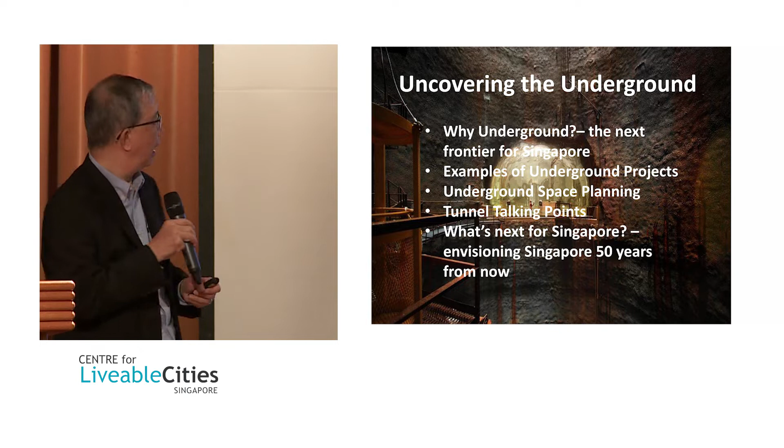There are also several journals on underground space, but they generally tend to cover countries in Europe and the Western Hemisphere—not many cover things inherent and intrinsic to Singapore.

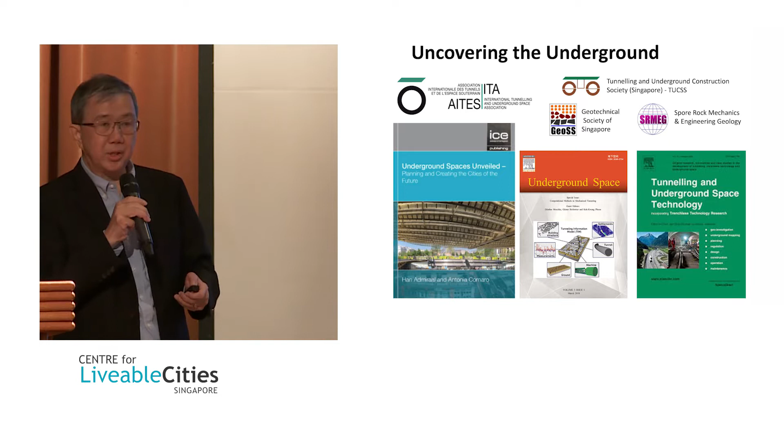So we have three societies here: Tunneling Underground Construction Singapore, the Geotechnical Society of Singapore, and the Singapore Rock Mechanics Engineering Geology society. They organize regular symposiums about tunneling and underground construction in Singapore, where you can find a lot of local information.

More recently, Arup was commissioned to do a benchmarking study and establish guidelines for underground space planning, submitted to URA, from which they organized an exhibition called Underground Singapore: Next Frontier. If you don't have this, you can go to the URA website—the documents are all available. Even Hong Kong has a 'Cities Without Ground' guideline on this.

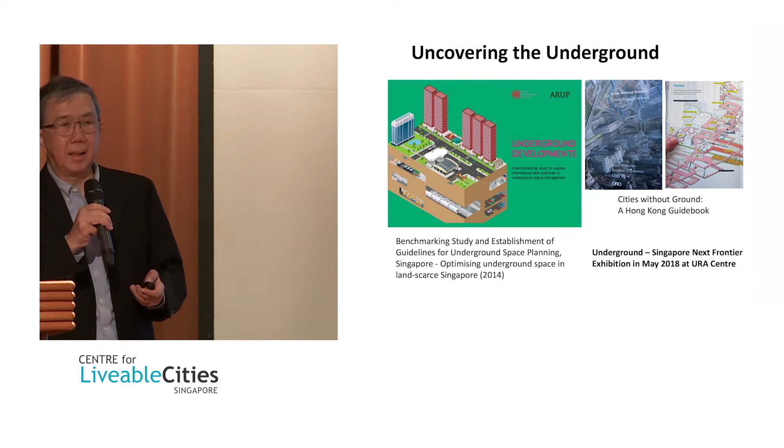So literature abounds—it's nothing new, but unless you actually work on it, you still find there's something uncertain and unusual about underground. So as we move from the knowledge base, where we have a lot of information, what do you mean by underground, and why underground?

First, I'd like to take you through the perspective of Singapore. We are basically a finite land area of 700 square kilometers land and 700 square kilometers sea—so this is our boundary, total 1,400 square kilometers. And that is finite, okay? That is finite.

We have challenging geology—soil and rock. About two-thirds of it has basically rock near the outcrop, near the surface area. Another third, the rock is further down. But as far as I'm concerned as an engineer, the whole island is actually on rock anyway—it's just what is above the rock, whether you have weathered material, or the yellow part, which is soft formation, or the orange part, called Old Alluvium, which is basically stiff, dense sand and stiff clay.

Now, it is challenging geology, but it's not that we don't know it. There's been a lot of work done, much due to LTA works and Singapore Power works, so anything we need to know about the conditions on the island, I think we are very familiar with.

What we do not know, and which is going to be taken up by the underground geological survey, is going deeper beyond the usual 50 meters that we do in exploration.

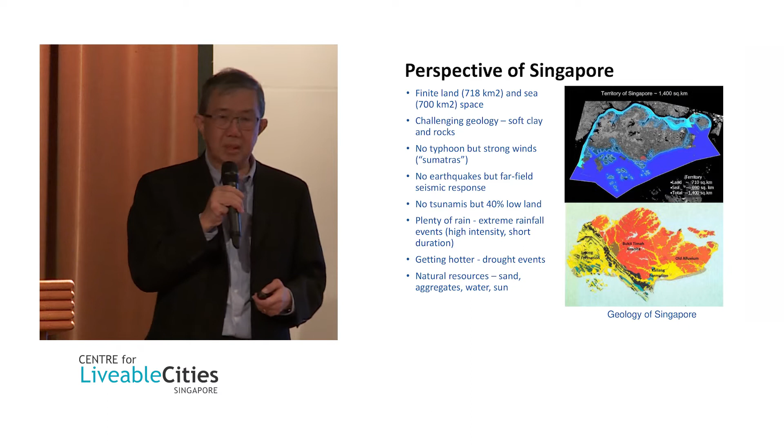A lot of people say that we don't have resources, but we do have resources. We have plenty of sand - they're all in the western part. There's a lot more sand we want to mine, but of course they're also in the way of development. Then we also have aggregates that can come from all the rocks that you intend to mine. You excavate underground, and you provide a lot of aggregates. And then we have plenty of water.

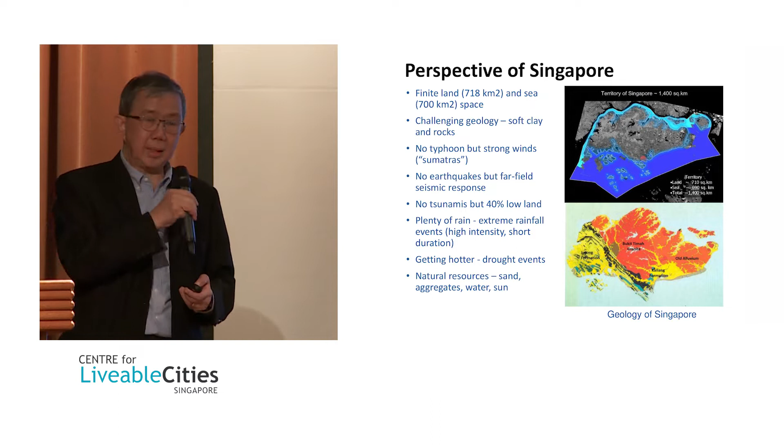This comes from our rain, but we don't collect enough of it. And then, of course, we have plenty of sun. We should look at this natural resource and see how we can leverage it, rather than say that Singapore has no resources. Singapore is a small island, but we have big needs.

Let me clarify between a city-state and a city in a country. Take London, for example - if London needs an airport, London has the old London City Airport, but to extend, you just build outside of London at Heathrow. Singapore's airport, port, defense, commerce - everything must occur in our 1,400 square kilometers of sea space and land space. So it's a very tall order to try to accommodate all of this, where many cities worldwide have a lot of hinterland for them to grow and put all the other non-essential things.

Because of that importance, there was an interministerial committee on sustainable development in 2009. First of all, the motivation is a lively and livable Singapore. And what were the strategies for sustainable growth? So one of the key strategies, apart from all the other economic direction, is basically how to expand land resources: go higher, go wider, go deeper.

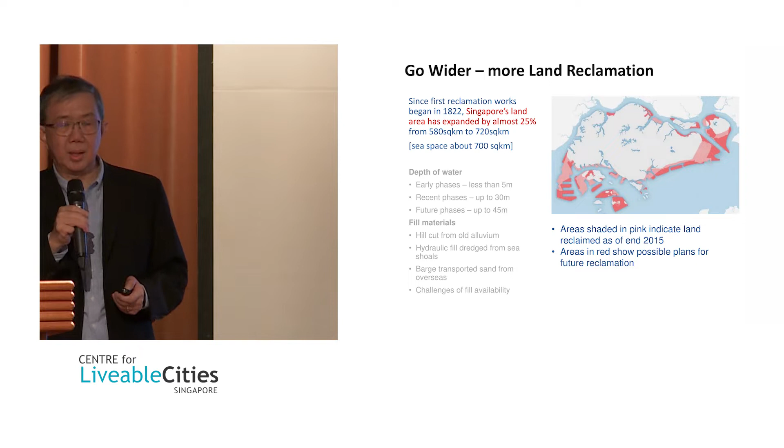Go higher - we're beginning to see HDB buildings go up to 40, 50-story blocks. In the past, it was up to 20 meters, 20 stories. And go wider - basically we've reclaimed almost 25% of our land since we first started reclamation in 1822. The first reclamation was in Telok Ayer.

Then we look at all these areas down here. The pink areas are those already reclaimed as of end 2015, and the rest are potential areas to reclaim. But as many of us know, we're having a problem with sand supply, so the difficulty of getting sand is challenging our ability to complete reclamation. Under the NRF as well as the NIC project, we've been looking at other alternative methods of reclaiming land, including even the possibility of floating platforms and so on.

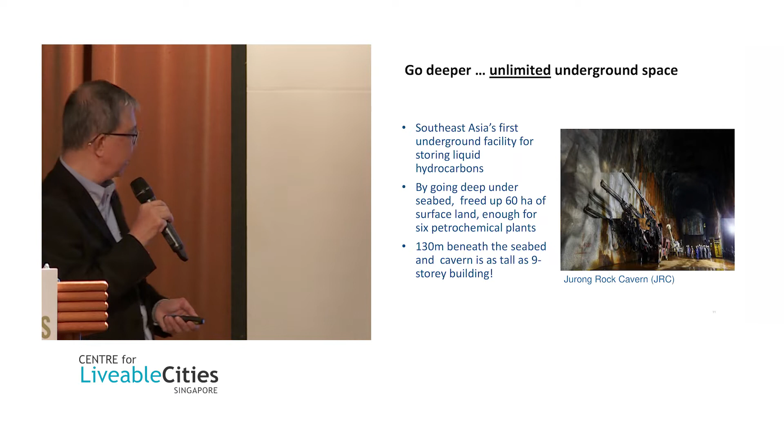Now we go deeper. As I said, when you want to go deep, it's unlimited—you can go down to the center of the earth if you want. I'll tell you the reasons and challenges of going underground. But basically, this is our deepest facility: the Jurong Rock Cavern, 130 meters beneath the seabed in Jurong Island. This cavern is as tall as a 9-story building, used to store hydrocarbons.

Now, my definition of underground—many people only associate it with caverns. No, to me, my definition of underground is anything beneath the ground. Right now it's a very structured procedure. Although we still don't have an underground master plan, in some way we do have structured guidance on where we put our underground facilities.

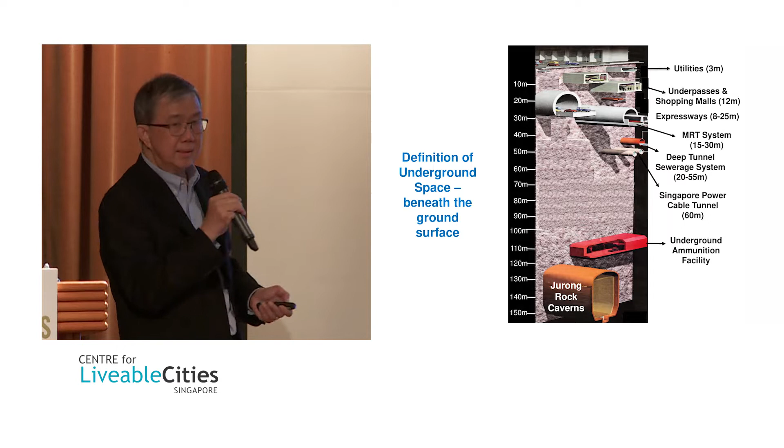Utilities are generally in the top 3 meters. Our shopping malls and other parcels go up to about 12 meters, sometimes deeper for 3 to 4 story basements. Expressways go up to about 25 meters, and generally they tend to be higher than the MRT because you need ramps to get into them—the deeper you put it, the more ramps and more land take. So you try to put your expressway or road tunnel as near to the surface as possible. But for the MRT system, you can use elevators to transport people down into stations, so you can put that deeper—you don't need ramps to bring things above ground.

Below the MRT, you'll be 20 to 55 meters down for your deep tunnel. The main tunnel trunk is usually at 40 to 50 meters. The 20 meter ones are the link sewers that try to connect everything into the main tunnel. Then you have the Singapore Power cable at about 60 meters down.

And then we have 2 cavern projects. The first is the underground ammunition facility, which is actually in granite. Then in the Jurong Rock Cavern, this is in what we call sedimentary rock. So we've done both rock formations in Singapore to show that both are actually possible.

The purpose for both of these going very deep down is because they're looking at the quality of the rock. As we know more and more about it, there's nothing to say that we cannot have underground structures anywhere in this area. In fact, the possibility of even constructing in soft material is now being researched at NUS, where they look at how you can treat those areas to make them usable for underground use.

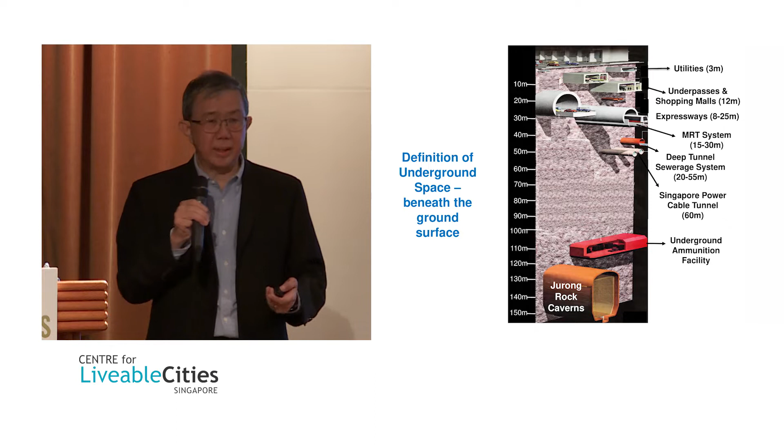So let me take you to some of the other underground projects. Now, I will ask many times—how ahead of the curve is Singapore in terms of global underground space? We are very far behind.

We are very behind because everybody cites cost as a reason for not going underground. I think there has to be some mindset change about the possibilities of going underground, because everywhere else in the world, they're already doing it. So we are far behind—you'll see from some of the examples I'll give you how far behind, but at the same time I'll also show some of the projects we have actually done.

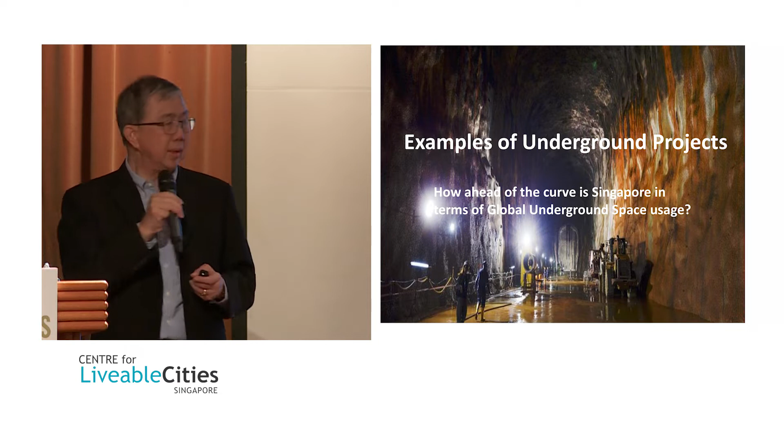Thanks to the History Channel, you can easily find that we already had underground cities as early as the 8th century BC. In Turkey, there are 36 underground cities. The biggest, of course, is Derinkuyu underground city, which could hold 20,000 people up to a depth of 85 meters. This is typical of it.

They were able to do it because they have volcanic rock, what we call in engineering terms 'soft rock.' Soft rock is easy to excavate and quite stable in that respect. Most of the underground facilities in those early days were always used as a refuge for war and invasion.

So if you go into the second example, I show this just for a lighthearted touch—this is Pilsen, which was used for storage but also as an escape route. The reason I show that is, for those who love beer, this is a pilgrimage city—you should go. The biggest beer drinkers are not in Australia and Germany, they're actually in the Czech Republic in Pilsen.

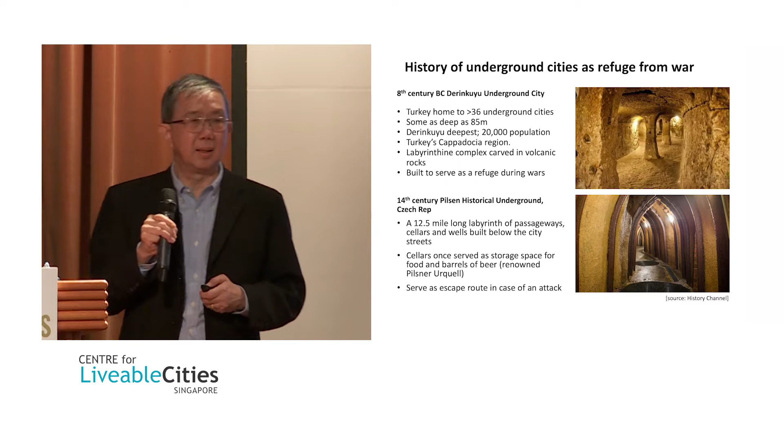That's why you go down there, they drink beer as if they were drinking water. You should make it to Prague, a nice place to go if you haven't been there, but go and visit Pilsen. It's a very nice place for you to visit.

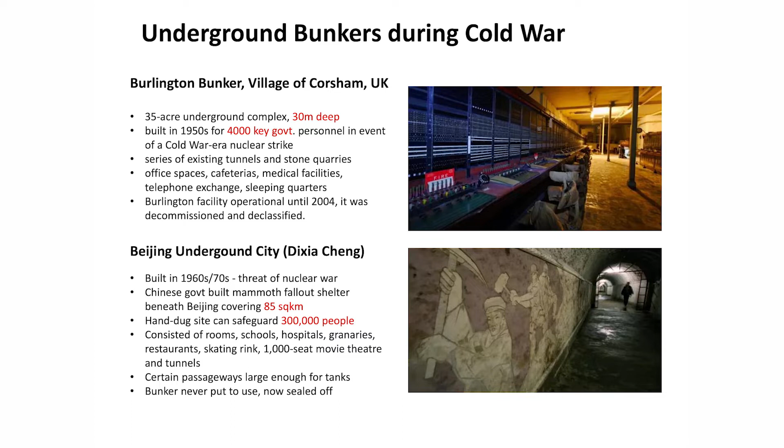Then in the Cold War, we have underground bunkers. The British built the Burlington bunkers. Beijing has an underground city that not many people know about. They opened it up for public viewing in 2000, but closed it in 2005 for two reasons: one, it's been used by homeless people; two, for security reasons they decided to enclose and seal up all the underground city bunkers. But they are not small—these bunkers are big, 30 meters deep, can hold 4,000 people.

In the case of Beijing it's even bigger, 85 square kilometers, and can hold 300,000 people. Some say even up to 1 million. The good thing is that they are not used and don't have to be used, and that's interesting. I'm just showing two examples, but everywhere in the world, I'm quite sure even in Singapore, every country will have some bunkers for defense purposes in case of attacks. This is already common in every country.

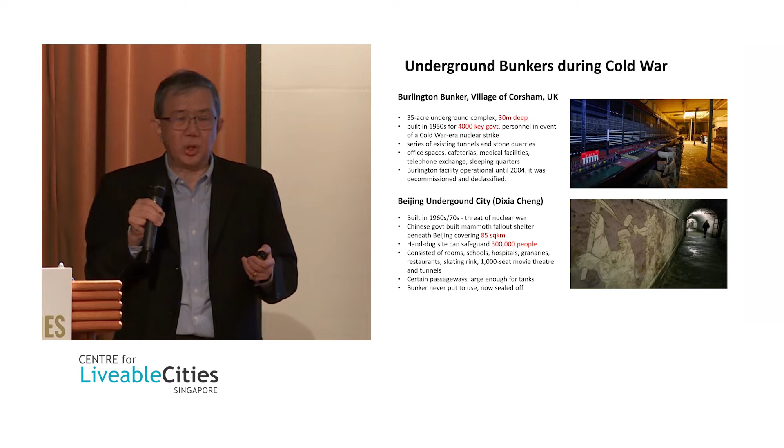You go to Russia, they're full of it. The biggest number of bunkers that I'm aware of is actually in the Middle East. Their bunkers are so huge that they have hospitals, schools, everything that you need to survive if there's an air attack.

For modern day underground cities, there are many examples, but I'll highlight Montreal because it's best known. This is RÉSO, French for network of connection—a network of tunnels. This is one of the biggest, and all they did was try to link up all the basements of the Montreal underground. 500,000 people spread over 4 square kilometers—roughly the space between Orchard and Marina Bay, all the area together.

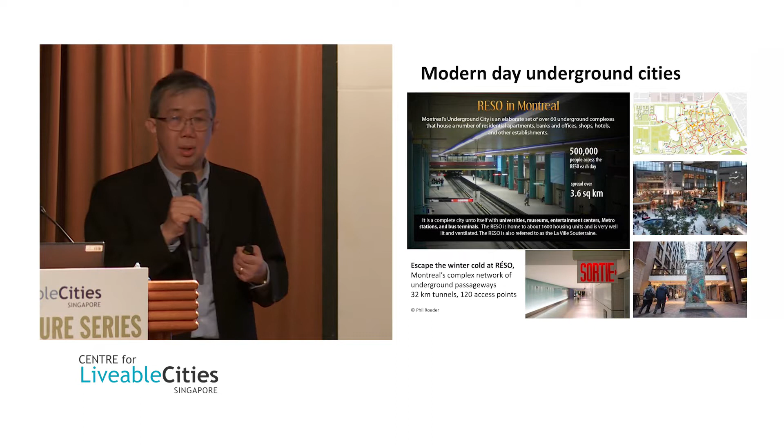The important thing is that it's actually a place the community looks forward to—a place to escape the winter cold in Montreal. This has been used very widely. Even though it's underground, through clever engineering you bring in daylight, you still have trees—nobody says you can't have underground trees—and you can have skylights dropping light down into the underground. So all of this can be done.

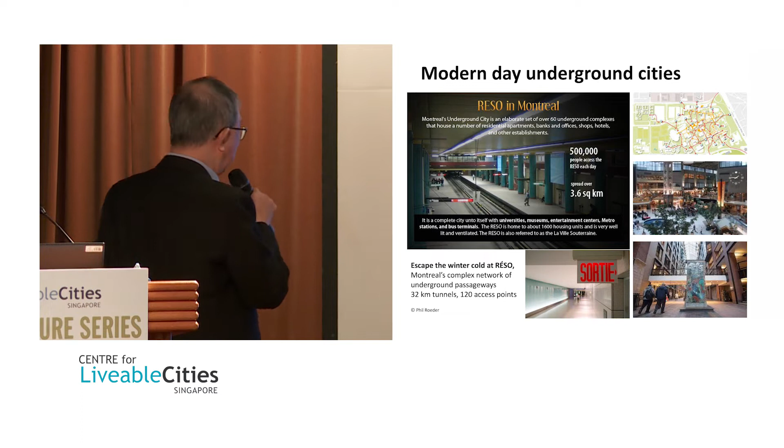Many countries now, because of climate change and high intensity rainfall, are building underground stormwater drainage. The Hong Kong West Drainage Tunnel, basically deep, tries to take away most of the runoff from the hills so it doesn't go into the city and flood it. Tokyo already has the G-Cans project—an underground tunnel 6.4 kilometers long, linking 5 silos where they collect water from all the areas, then bring it into one huge tank called the temple, where they store the water.

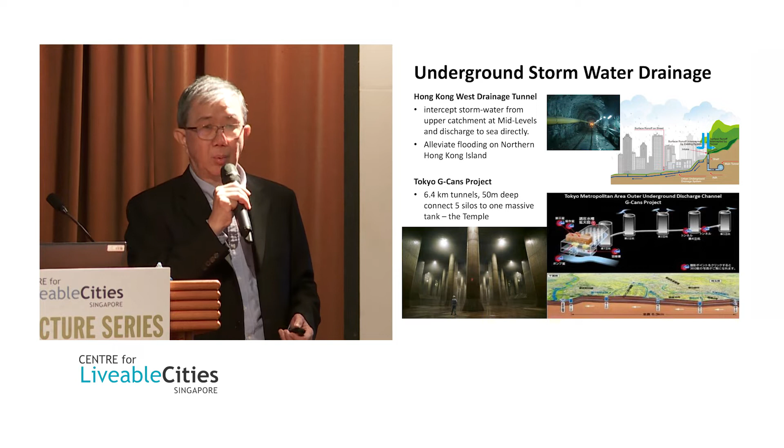I understand PUB is looking into something like this, and I think they should. Rather than widening or deepening the existing surface canal, we should try to put the stormwater drainage underground. We've already done it with the deep tunnel sewage system, and there's nothing to say we can't do a similar one for the stormwater system.

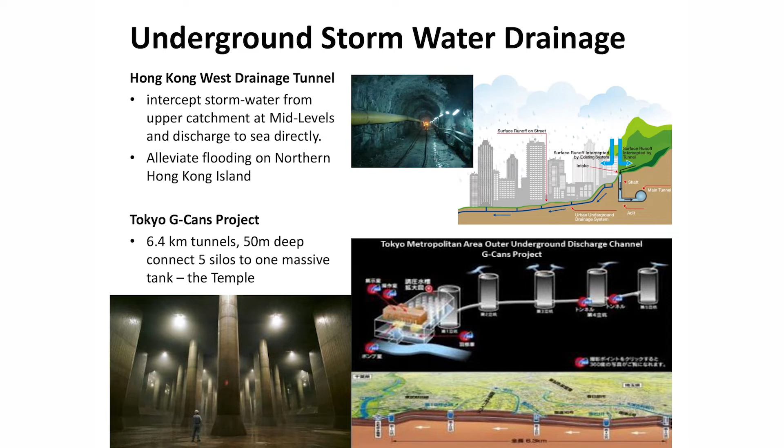But the country that's leading in all underground construction is actually China. In the past, many of the technologies that we've used in Singapore came from Europe, then Japan and Korea. They were all doing underground work. And then more recently, much of the technologies and new ideas are coming from China.

They have 65 cities that are going to build metros all along. Many of the cities are actually expanding vertically. They found that cities expanding laterally have issues of transportation and other problems, so they're beginning to go vertically. Many of the cities are also having underground master plans.

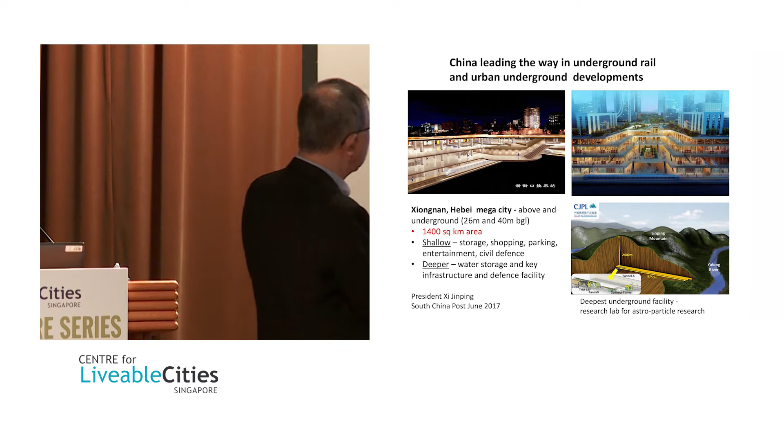I happened to be in China as a technical advisor to the Shanghai Municipal Commission that looks at the use of underground space. When I was there, they shared that in some of the lines, Shanghai is so developed they can't find anywhere to put the station. So what did they do? They buy up basements within shopping areas and convert them into underground stations, rather than build another station from scratch.

And two of the stations are now being converted from formerly commercial complexes.

And the deepest underground facility that I know of is about 2.4 kilometers. This is actually in China, in the Jinping Mountain, where there are the deepest underground facilities for astroparticle research. This has already been completed at 2.4 kilometers, the deepest that I know of. But again, in the case of China, they do everything big.

The presidency announced, as reported in the South China Post in June 2017, that they're going to embark on a mega city in Xiong'an in Hebei. Hebei is basically the province surrounding Beijing and Tianjin, once you extract those two cities out.

They are looking at two levels, one at 26 meters and one at 40 meters. Where it's shallow, at 26 meters, they put storage, shopping, parking, everything. At 40 meters, they're going to put water storage, key infrastructure, and of course defense facilities.

So Xiong'an is actually near Beijing. This is all in preparation—if there's any unintended attack, they just go into the Xiong'an mega city. But otherwise, in normal day-to-day life, it's still going to function as a city by itself.

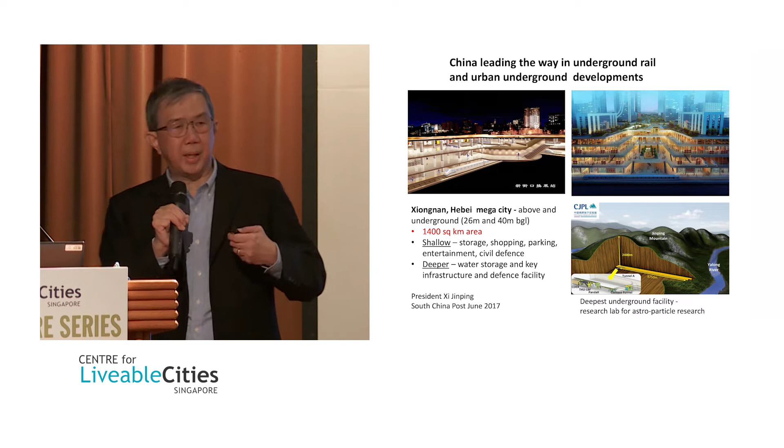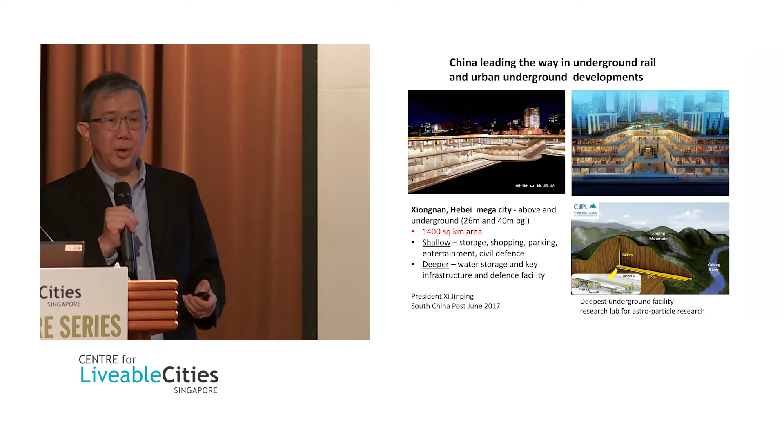I won't talk too much about this other than my own experience with underground projects in Singapore. I've been involved with the LTA, both as a board member, from which I've stepped down, and for over 12 years as chair of the IPA, the International Panel of Advisors, where we look at all the geotechnical and construction issues in our LTA projects—an international advisory panel where we also learn from what the rest of the world is doing.

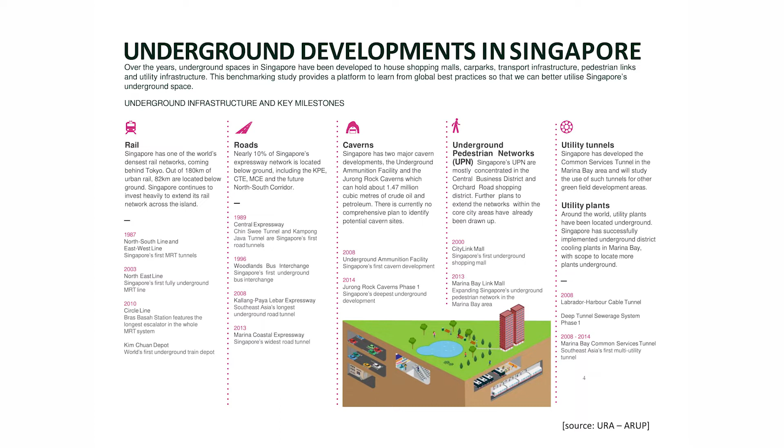This is one of the bigger uses of underground space in Singapore, our rail transport system. Bencoolen right now is actually the deepest station at 45 meters.

Now I'm involved in some land optimization efforts. The next three slides show land optimization efforts at a whole-of-government level. The first was the earlier one on underground ammunition storage.

If I can take you through this quickly—this was all driven by Professor Lui when he was the chief defense scientist in MINDEF. Before then, ammunition was stored in an area where we had to sterilize 1,000 hectares of land, because if there's an explosion, it can't reach the neighborhood. The current rules and underground storage standards for explosives, which came from the West, show that we need about 240 hectares to put everything underground.

Then Professor Lui, together with these engineers and NUS and NTU, started a series of research pertinent to our local conditions. What we were able to do is get our ammunition storage down to a footprint of only 100 hectares. One of the interesting findings was that water is actually the best defense against explosive waves.

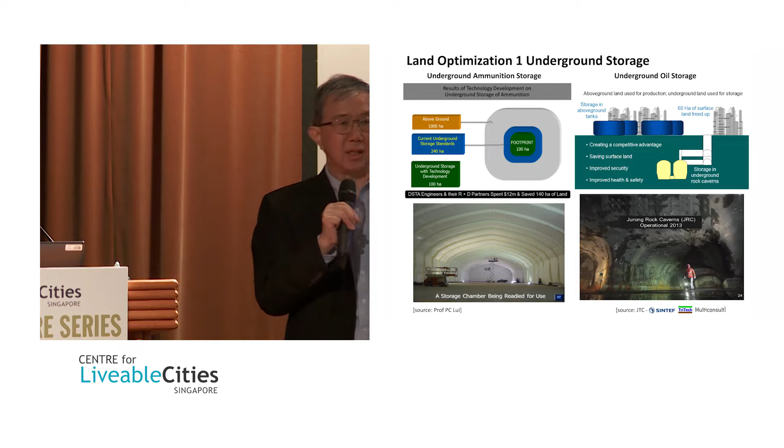Any explosion energy waves that come up from an explosion, water is a very good dampener. And that actually formed the whole basis of design for this underground facility.

Of course, we had to do a lot of simulation. We did tests in both Norway and Australia to show how things work. The rest of it, including the defense, the gate and all these, were all tested. So finally, we only need a footprint of 100 hectares underground, and we therefore free up all the 1,000 hectares above ground. And this is what you see in the underground. It can be as pleasant as you want it to be.

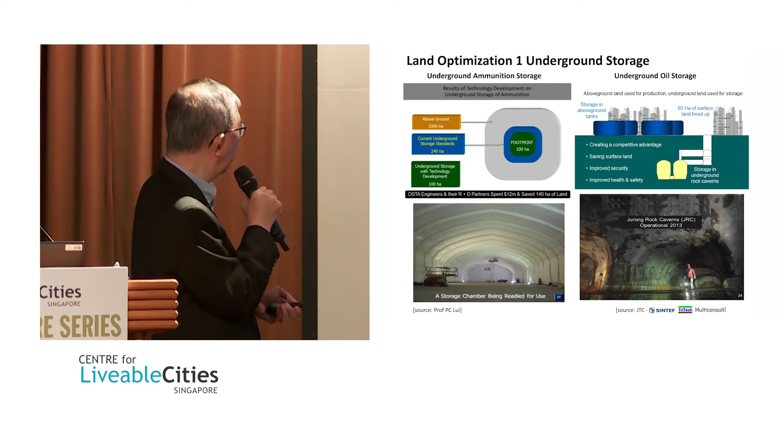The second project we've done is the underground oil storage. This is the Jurong Rock Cavern, completed and operational around 2013. There's another phase going on, I understand. You can see down here, these storage tanks above ground occupy a lot of space. You put this storage all below ground, you free up a lot of land for other surface activities that's needed. On top of that, you're improving security, and you're also improving health and safety in this area. This is actually the completed Jurong Rock Cavern.

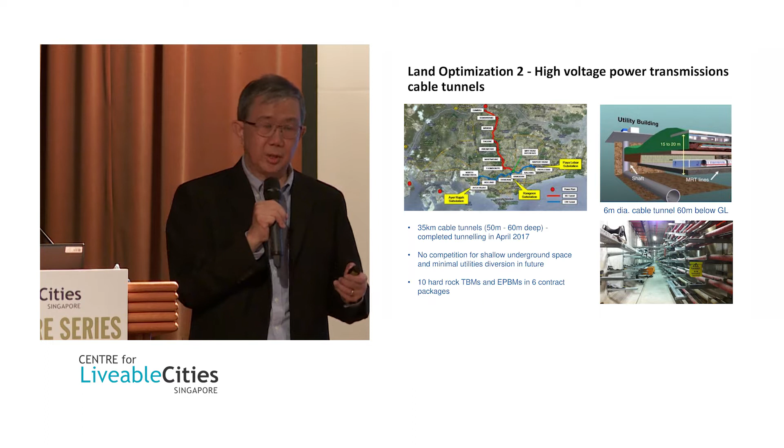Land optimization two, we're putting all our cables very deep. This is the high voltage project which I was involved in. Because we did not have the 2015 Parliament Act passed at that time, they had to basically follow all the expressway routes, following the CTE, following the AYE, in terms of having to go under the roads. Unlike the MRT, where there is an easement right that lets them go underneath buildings, the cable tunnels didn't have that opportunity at that stage. But things have changed with the 2015 Act of Parliament.

So essentially, this is 35 kilometers of cable tunnel, 50 to 60 meters deep, and they generally go very deep below all the infrastructure. This is what it looks like now, today, inside. You cannot tell the difference between whether this is 60 meters or actually 10 meters below the ground. They are trying to move a lot of it underground, but there are still surface utilities that we have that I think we are not doing much about.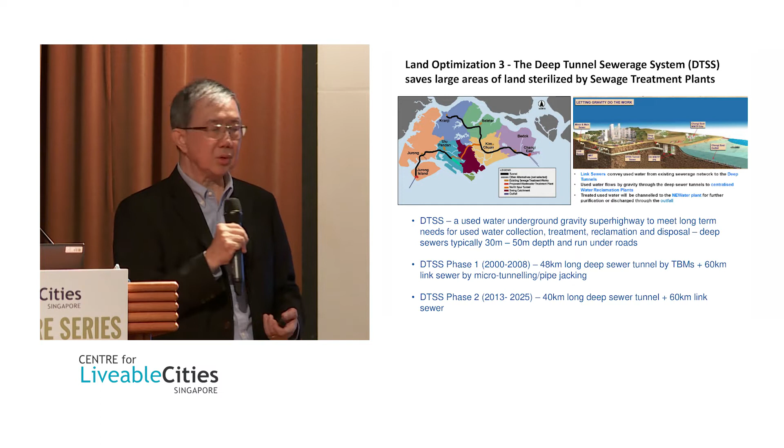The last land optimization is the deep tunnel sewerage system. You can see that this is now going on to phase 2. Phase 1 we have actually completed, and it's around this area. Phase 2 now is actually from this area onto this area. Basically, again, this is just putting everything underground so that it does not cause disruption at the surface. These are facilities where you don't need people, you only need to send in a maintenance crew, and these are things that can actually go underground.

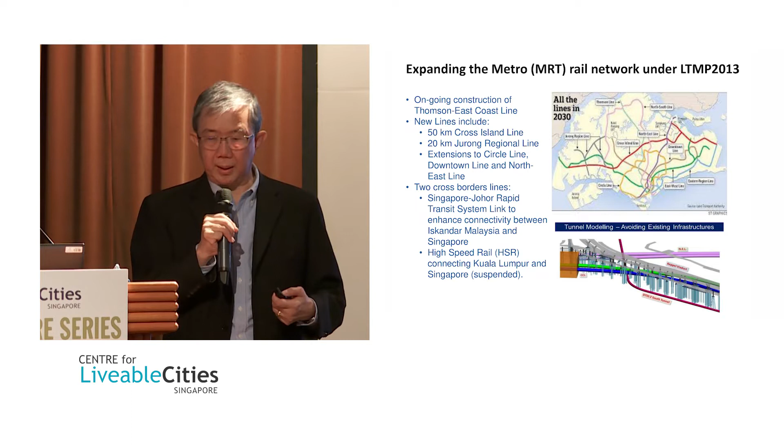And of course, we're also expanding all the metro. There are lines indicated here. Currently in construction is the Thomson East Coast Line, but then we are going to have the Cross Island Line, Jurong Regional Line, extension to the Circle Line, Downtown Line, Northeast Line, and a couple more lines being considered, because if we need to achieve the vision of 8 out of 10 homes within 400 meters of a station, then you need a lot more lines to cover more parts of Singapore.

Now, as we have more and more lines, I have a very simple slide here to show that when you look at all these, you have the Northeast Line, the Keppel Viaduct, the Deep Tunnel Sewerage system, the Circle Line, and a lot of infrastructure. So in fact, the underground is really crowded. We can all build this engineering-wise, but it costs a lot of money to protect the existing structures in order to build the new structure. This could have been saved if we had actually done underground space planning earlier.

This is something that the government is well aware of, and they started doing this underground space planning at least 5 to 8 years ago. The way the URA has planned is that they have a concept plan, and then this 5-year regular review of the Master Plan Committee that governs all development in Singapore within a 5-year time frame. Then you have the Communities Facilities Co-ordination Committee that looks at the whole-of-government approach.

And then, of course, the recent one is underground. You have the Underground Masterplan Task Force led by the MND, and then you also have Advanced Planning Interagency Coordination of Future Underground Plans.

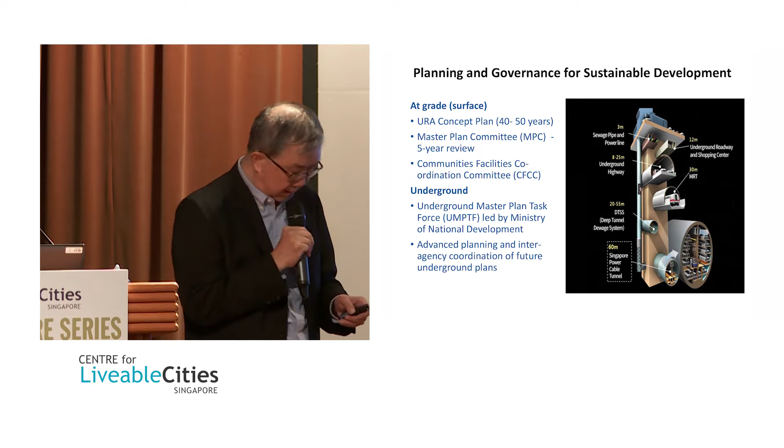Now, I'd like to show this slide mainly from the fact that, if any one of you out there know where this information came from, I'd like to put it as a source. I took it out somewhere and forgot where exactly. I tried to trace all the papers I read, but I don't know where it came from. If you are the original author, please let me know, so at least I can give due credit.

But what I like about this picture is it shows what I hope one day we'll be able to do. We don't have to build underground highway, MRT tunnel, deep tunnel all as separate tunnels taking up unnecessary space. This is what I hope you'll call the mother of all tunnels—you put everything into one, and they can share the space there. I only need to do tunneling once, disturb people once, find the right depth, and meet all the requirements.

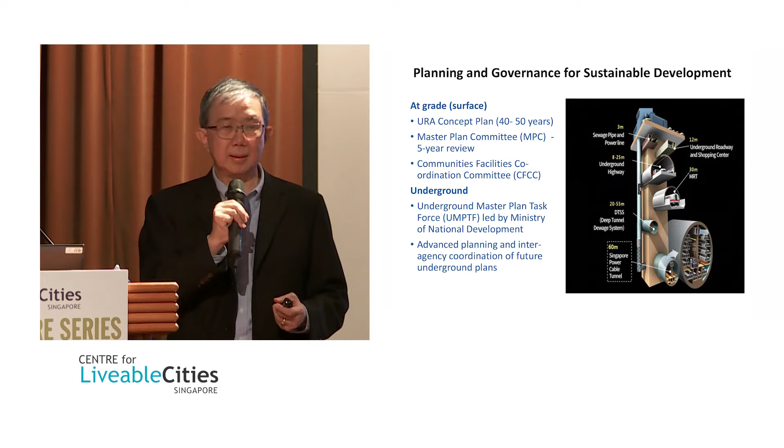But these kinds of things have to be done very, very early, at the real planning stage, before we even need it. The reason why we have to allow each of these separately is because everyone came in very late, all for strategic reasons—if they don't finish by a certain time, something's going to happen to the country, so we just carry on building.

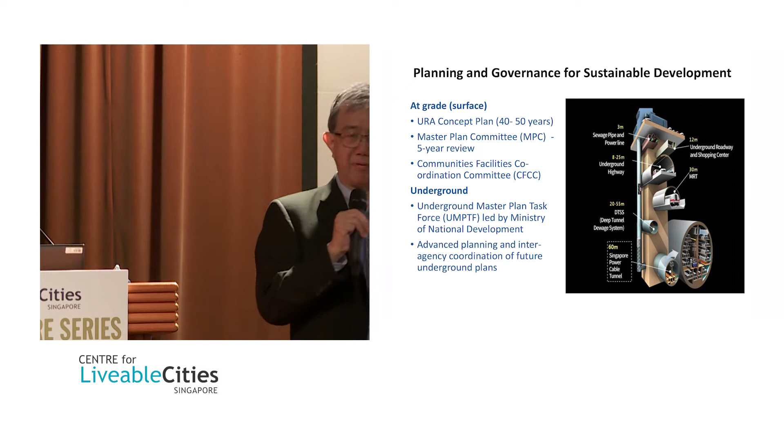So I think at some point of time we need to decide: if I'm going to have a master plan with a big tunnel, who wants to build their facilities inside? No different from our common services tunnel that you see in Marina Bay—nobody wants it, but once it's done, everybody wants to put their thing inside it.

Now, this is where the 3D master plan comes in—because Adelie is here, I will leave some airtime for her to talk a bit more, but this is just a snapshot to show there are a few initiatives going on in space planning. One, of course, is the 3D master plan, which tries to integrate the above structure with the below. More important is how to safeguard corridors and safeguard vertical access.

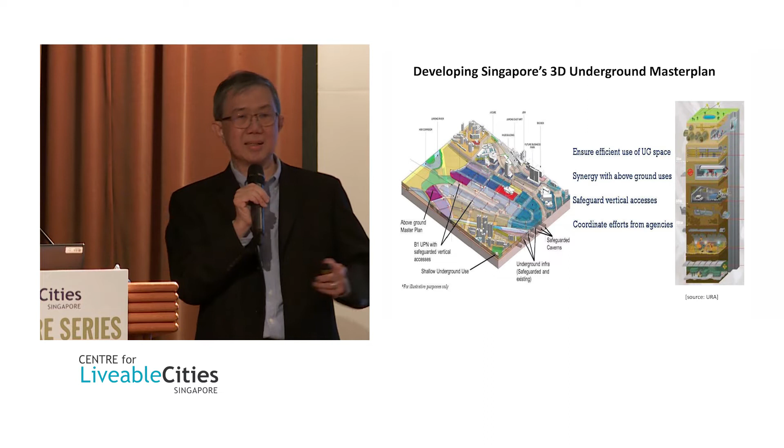I can do anything underground, but first I must be able to get vertical access to where I have to go before I can start construction. So that vertical access is very important. What they're trying to do is safeguard areas and places for access and so on, and also define roughly what kinds of structures can actually go underground.

And then, in 2013 I believe, the British Geological Survey was commissioned to do the 3D model of our bedrock. The geology of Singapore was done in '76. In fact, the earlier geology was done by the British in 1925—that was the first approximate geology. But when the Public Works Department did a comprehensive geology of Singapore, it was later updated by the DSTA in 2009.

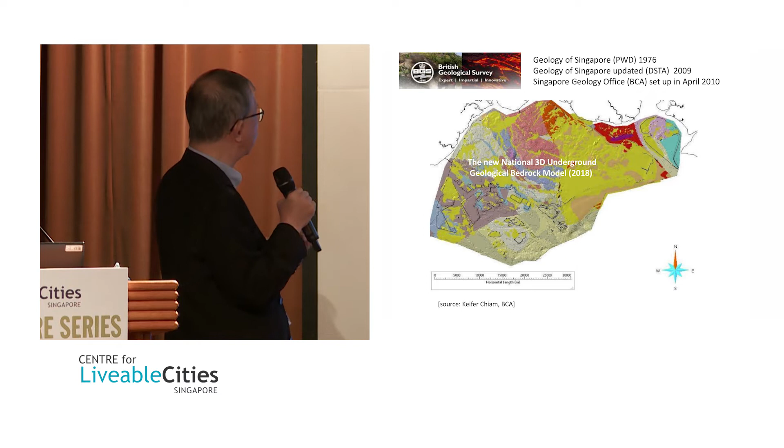After the Interministerial Committee that looked at the importance of space, they set up a Singapore Geology Office in 2010, headed by Keifer Chiam from the BCA, who then spent the last 5 or 6 years looking at this, and it's now completed. They're now going through a state of industry consultation, or what they call socialization. I hope the underground planners at URA will take into consideration what kind of geological profile suits what kind of activities.

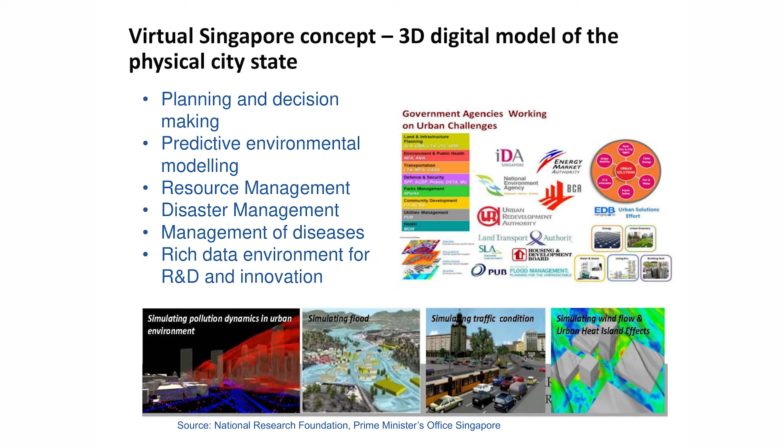And then we are also, led by the NRF and so on, trying to create a virtual 3D Singapore. So we have various agencies doing it—URA, SLA, and NUS has done its 3D virtual NUS campus; we have done it too. Again, these are all tools useful for planning and decision making.

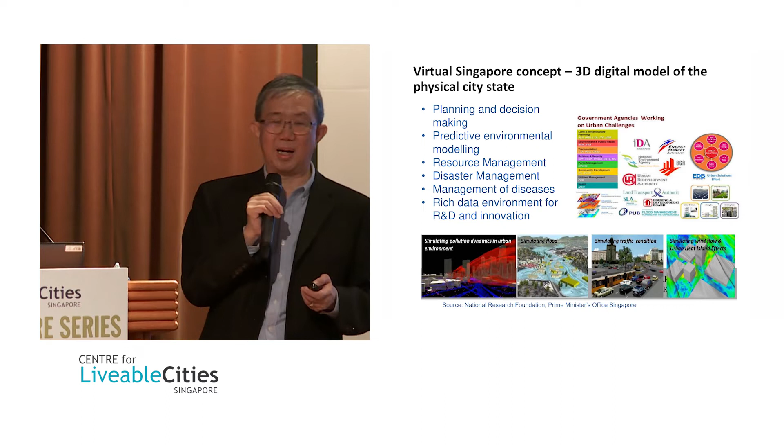But the challenge, of course, is how do I integrate the underground master plan, the geological map, and the virtual Singapore into one. Those things are considered very exciting, but I think nobody seems to know how—maybe Adelaide can share something about how we're going to integrate all these three things together. Now, my final talking points are basically just to probe discussion at the panel session.

Okay, these are not necessarily things I have answers to, but I thought they were relevant from my perspective. First of all, legal planning and framework.

First is the State Lands Act. This was amended because in the past, Singapore followed British common law, where whatever land you own, anything all the way to the center of the earth was actually your land—you could do anything you want. But with this act now, you only own up to 30 meters under the ground.

Below 30 meters, the government has the right to do it. Then there's also the Land Acquisition Act. Between 0 and 30 meters, if they need to pass through somewhere—assuming this is a 30-meter datum where they can do anything underground—they can actually buy up your surface land and specific strata for doing that.

But there lies another thing which I'm challenging the legal experts and planners to think about. As I mentioned earlier with China, they now have stations that run into commercial buildings. They buy up the basement and convert it into a station, because within urbanized areas they just can't find another space to build one. Two of those commercial buildings are being converted now to underground stations as part of the Shanghai Metro.

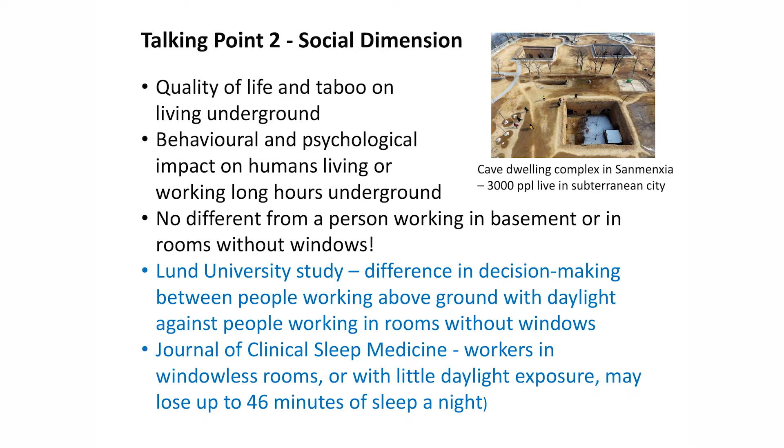Then there's the behavior and psychological impact on humans living or working underground for long hours. This is a concern, but personally I see no difference from a person working in a basement room without windows. Unfortunately, we do have a lot of places where rooms don't have windows.

But I thought I'd share two interesting things. Lund University did a study on people working in rooms without windows versus with. They found the decision-making process between people working above ground with daylight and those without was quite different. Instead of reading the whole thesis, you can go read it if you want—I'll just give a very simple final finding: whether the glass is half full or half empty.

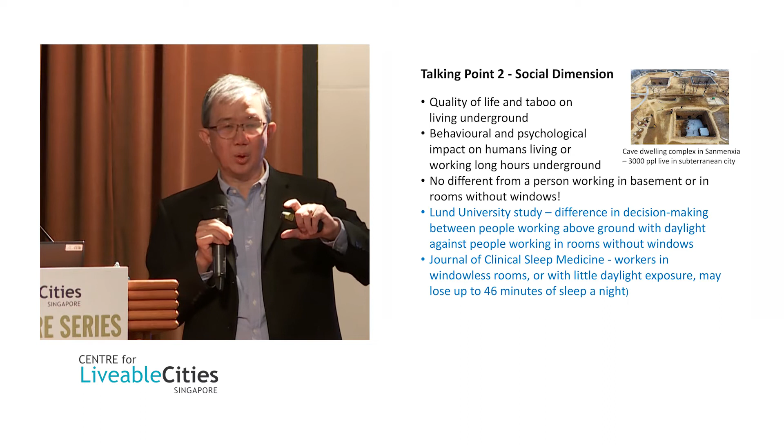The guy that works with a window is always a half-full guy. The guy that works without windows and without daylight is a half-empty guy. So you can draw your own conclusion from that.

Now, the Journal of Clinical Sleep Medicine says that workers in windowless rooms or with little daylight exposure tend to lose about 46 minutes of sleep. That's because you're off your circadian rhythm—your biological clock is changed, so it takes longer for you to actually fall asleep once you're in bed. This is clinical research, actually from the Journal of the American Academy of Sleep Medicine.

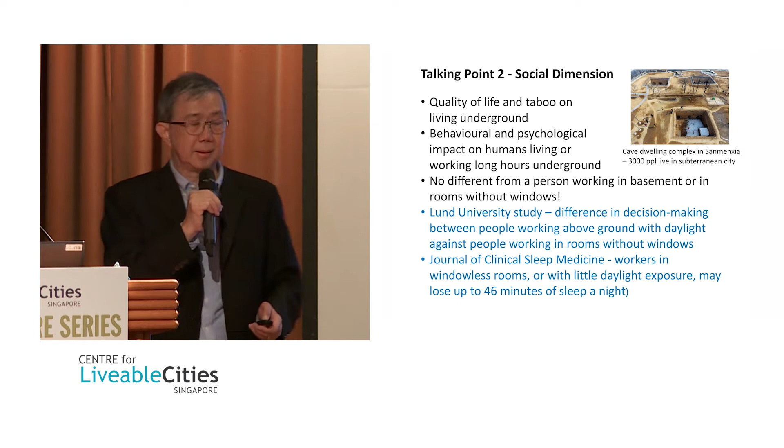Technical challenges, from an engineer's perspective: we have to differentiate between Singapore's underground challenge, which is urban underground, and places where people have plenty of rocks and hills with no buildings nearby. We are in an urban environment, so our space is underground urban space.

But the technical constraints and challenges in underground construction, whether in rock or in soft ground, are not insurmountable. We have a solution for everything. You give me time and money, I can solve any problem you want. But the challenge is that once it's built, you cannot go for en bloc sales anymore or keep changing the use of it, because it's very hard to tear down. So you either have to design for permanency, or design for a high degree of flexibility.

From the engineering perspective, there's really no limit to how much underground space, including below our seabed, could be potentially exploited. They've done a lot of projects. The only thing you have to handle, which I'll mention later, is water and other problems. The limit often lies in the economic and commercial viability of the project. Developers and government are all driven by the fact that there is a cost to building underground.

That's where it leads me to talk about construction costs now. The high construction costs are generally 2 to 5 times. Sometimes if your rock is near the surface, it can even be less than 2 times. The reason is, how do you provide access to go in? This costs money. How big is your facility, and your geology in that area, will determine the amount of measures you need to put in.

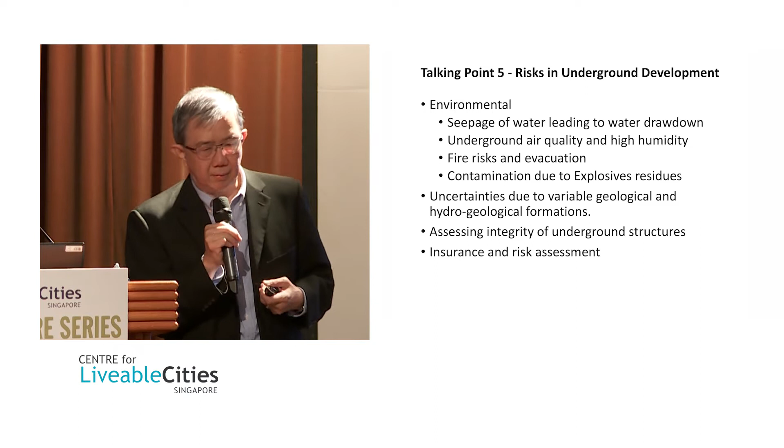Then the higher cost is compensated by savings in facade. Underground, you don't talk about facade, you don't talk construction maintenance. And in a lot of cases, studies have proven that you actually have lower energy consumption as well. This 12% figure came from an early estimate we did. Basically, part of the reason is you don't have to have an intake of a lot of these systems. The local environment itself doesn't have the solar gain that a building exposed to the sun has.

Then we must address additional institutional and economic barriers. The public sector should see the higher costs as a trade-off with gaining land and a better environment. You put a lot of the non-required things underground, and you can have a much better quality of life above ground. And for the private sector, I think this development charge must be addressed.

Talking point five: risk in underground development. First of all, the biggest challenge we have underground is how to keep the water out, during construction and during the life of that structure. So seepage of water, if not managed, leads to water drawdown, which causes settlement around the area, or changes the environment condition.

The other, of course, is air quality underground. Unlike above ground, I can just open my window and fresh air will come in. You cannot open anything underground - no air will come, only water will come in. And then you have the high humidity. The area is very humid down there. If you've been down to tunnels during construction, you'll find it's a very wet, humid place working down there.

Then, of course, there's concern about fire risk and evacuation - do we have enough escape routes? What if there's a fire, and so on?

And the other part, of course, is contamination. It can be due to contamination of my underground water supply during construction. It can also be contamination when I use explosives, because if you're going through rock, chances are you may have to use explosives to blow it up - explosives residues. If you're going to store water, then you have to worry about contamination in your storage water from residues, or if residues seep outside and contaminate the groundwater supply outside.

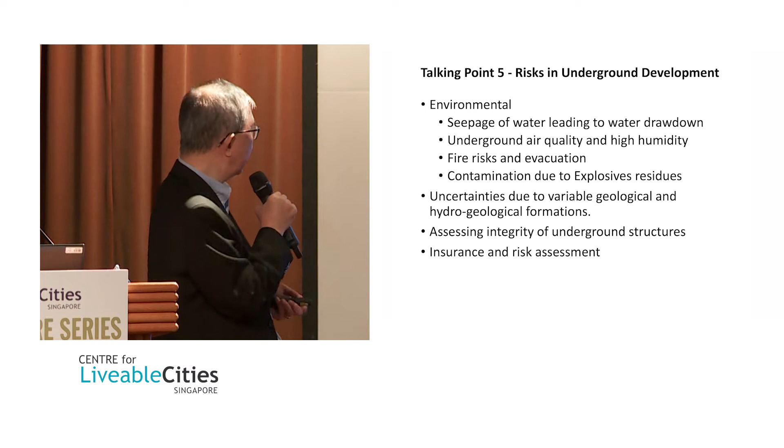Of course, you have this uncertainty due to variable geological conditions, but I think it's not a problem because you can really manage this if you have enough site investigation and studies to show otherwise.

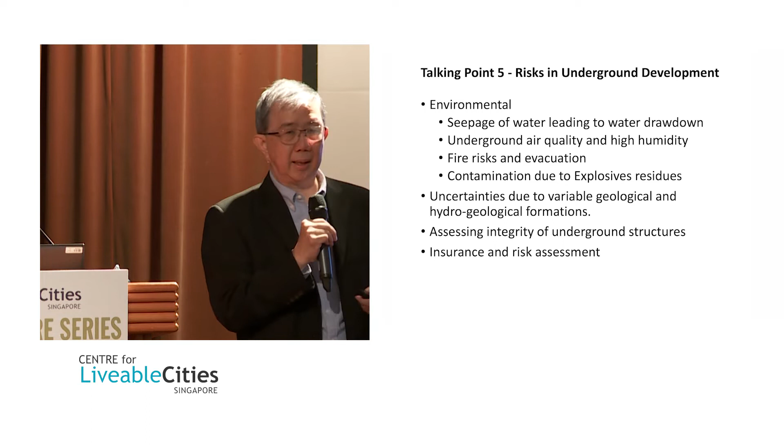Assessing the integrity of underground structures - now this is challenging, not easy. But certainly with all the sensors and technology that have been developed, we can make underground structures 'smart', where they can do their own self-evaluation about integrity, and report and sense conditional feedback back when you put sensors in your underground structure. And of course, insurance and risk assessment have to be looked into as well.

The last talking point is actually R&D. As I said, while the rest of the world has done a lot of work, we are still very far behind. That's the reason why we have this MND NRF programme, which I co-chair with Mr. Tay Kim Po, on land and livability. First, land indicates how we do space creation.

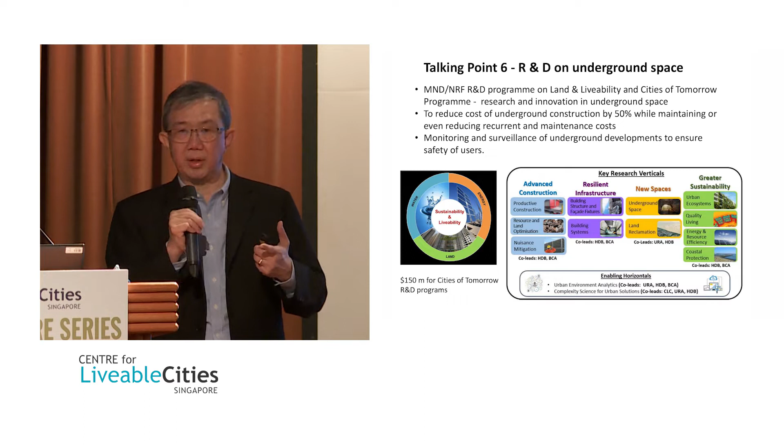Livability is, again, the quality of life. And then the Cities of Tomorrow program is just one step ahead - it's looking at all urban solutions, not just land and space, but energy, water, and all the necessary life infrastructure you need to sustain a city. So there's now this Cities of Tomorrow program, with 150 million set aside by NRF to look into water, energy, and land.

So the one on new space is underground space - there's a specific case here, as well as land reclamation. And in the case of enabling horizontals which cut across this, there's urban environmental analytics led by URA, HDB, and BCA, and complexity science urban solutions led by CLC, URA, and HDB.

So two of the bigger things that came out of this retreat, looking at what is the big, hairy, audacious goal: one is to try to reduce construction cost by 50% - this is still a challenge thrown to the industry. And then, how do you develop devices to monitor and surveil underground? So these are all being thrown out as challenges to the industry and the university.

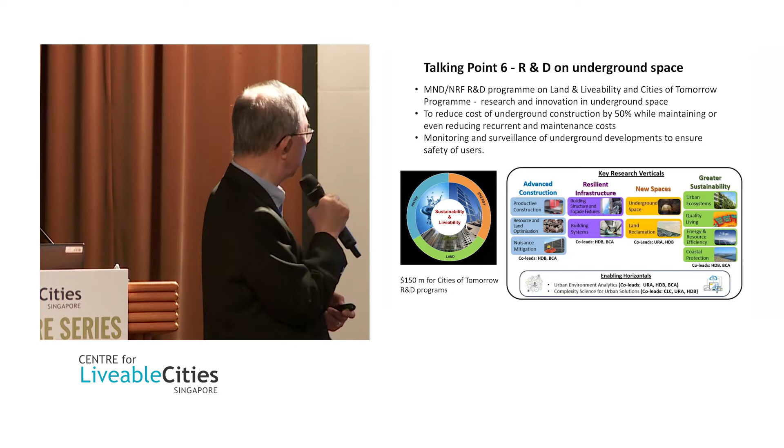First of all, again, the same thing - we're all pushing towards public transport where nobody owns cars, that's the best. But with AV cars, we can have shared green AVs. LTA has done a study showing that if we introduce AV across the whole of Singapore, because the cars are able to gauge a certain distance, unlike our present drivers who are not very clever and stop and start, traffic doesn't move very smoothly.

AV cars can adjust any time you want. With AV cars, we can actually reduce our road space by 30%. That's a lot of land that we can take away if we go into AVs immediately. Then, of course, if we have public transport, we can just move around in public transport. The AV is actually used maybe to take in the elderly, do the regular weekly shopping, and all this, but this will actually reduce our demand, and we put all the public mode underground.

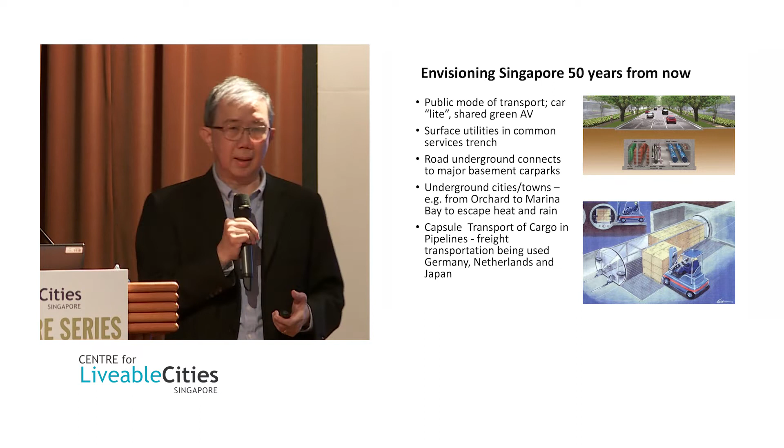I never like to drive next to heavy vehicles, but this is actually being looked into now - we can transport all our goods across the island by a series of capsule transport through pipelines. This has already been used in Germany, Netherlands, and Japan - not wide scale, but they have been used. So why can't we take all the heavy containers, trucks out? Can't we take the heavy cement trucks just by going through this system of network?

If we're able to build a network for LRT, if I have a big tunnel, I can build a lot of things that can also include some of these transport systems into it. Essentially that's what they're doing in Changi Airport - they're just building a very large tunnel. They put it in because they have to connect between Terminal 5 and Terminal 1, 2, 3, and Terminal 2 and Terminal 5. They build a tunnel - you can have people mover, bags mover, maintenance, services, utility, all in one tunnel. Why can't we do that for Singapore?

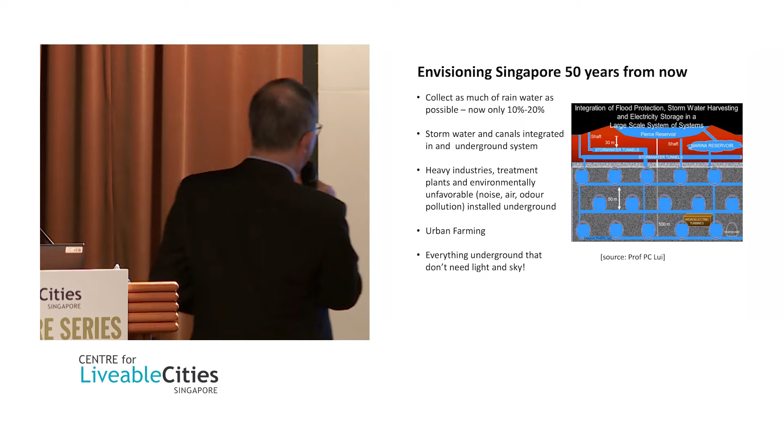My wish is that if you want a better quality of life, put every industry that is heavy, environmentally unfriendly, noisy, with air odor pollution, all put it underground - the cost is always there.

But I say you always bring cost, then we never talk about livability at all. There's nothing to stop urban farming. Seriously, urban farming doesn't need daylight. In fact, nowadays, urban farming is done in many cities of the world just using basically LED lights, depending on what type of plants you grow.

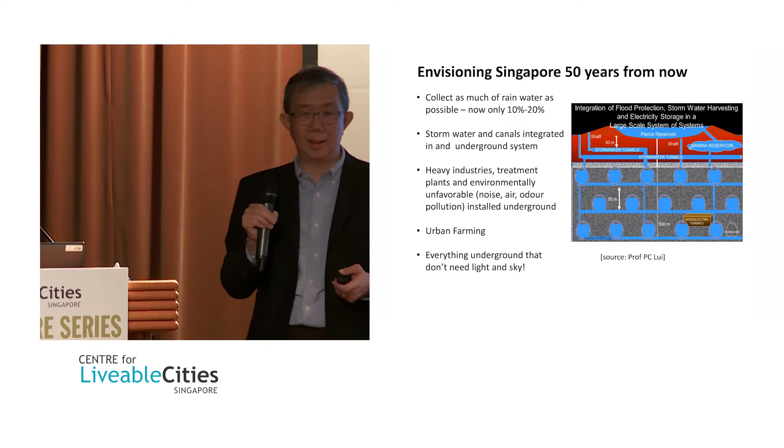They use different wavelengths of light to actually generate natural growth. This can be underground. And of course, the last scenario is everything underground that doesn't need light and sky. But that doesn't mean you cannot bring light and sky underground. It's been shown in many places that you can put a shaft in to bring some daylight down. I've seen in Montreal that you can actually bring trees inside. So these are all possibilities.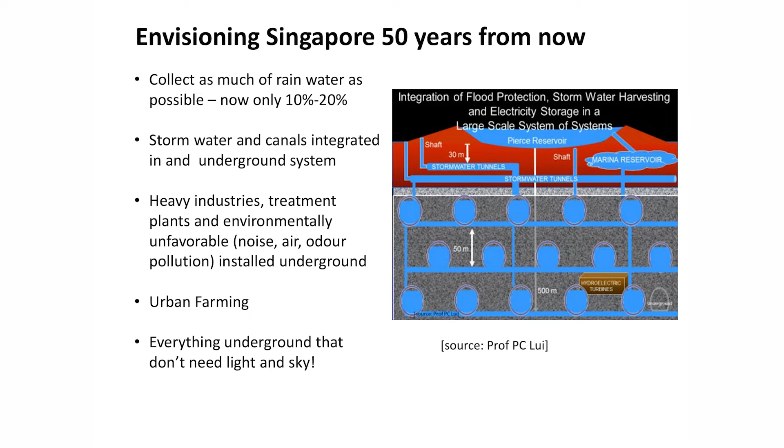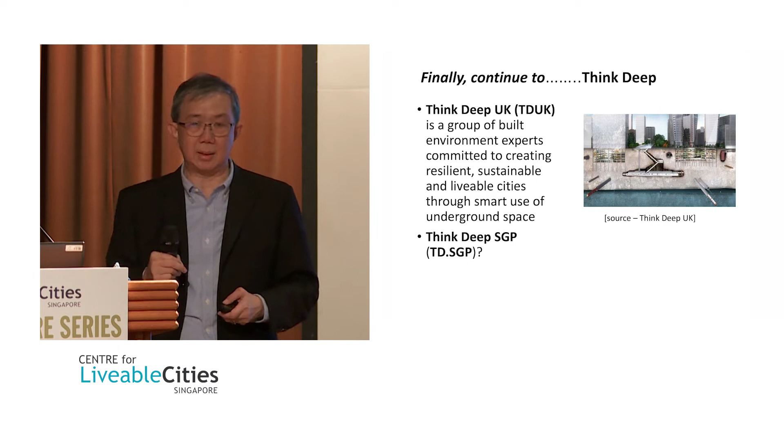I think it is negativity that is stopping us from being imaginative and bold to move forward underground. So finally, I'd like to leave something for everybody here who wants to take it up, and that is to think deep. This is a movement in the UK that I've been following. It's very interesting, and that's the reason why they came up with 'Underground Spaces Unveiled' by Han and Antonia. Both of them were active players in this Think Deep group, which is a group of built environment experts committed to creating a resilient, sustainable, livable city.

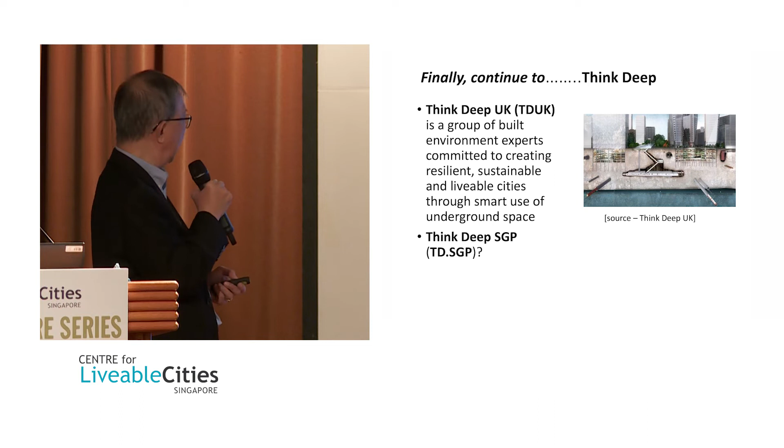They got together, it's only two years old. Over the last two years, they've been hosting discussion groups and seminars to try to combine planners, engineers, and policy makers into thinking deep about this. One of the active players, I think for the URA people, is Brian Collins. Brian Collins is an active participant in this, and he's also on the URA International Panel of Experts. So my parting message is: should we also have a Think Deep Singapore as well? Thank you.

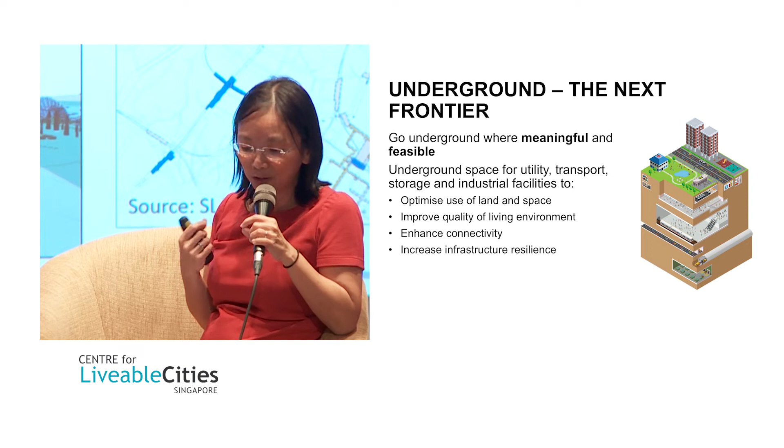As a government, that's what we want to do, but what's our role? We think we need to enable underground development in some ways. One of the key challenges is that when you're underground, you can't see what's down there. As Prof Yong has shared, we've actually been doing underground development for quite a while, so there's a lot of stuff down there. Engineers who are building underground will tell you it's always a surprise - every day you go down there and find things you never knew were there. That's something we want to fix in future.

So we're trying to put a more systematic way of organizing the data of what's underground, including things like buildings and structures, the utility lines. Utility lines you often think of as nice straight lines in orderly, parallel ways, but when you dig the road, you find they're crisscrossing all over. That's a problem faced in cities all over the world.

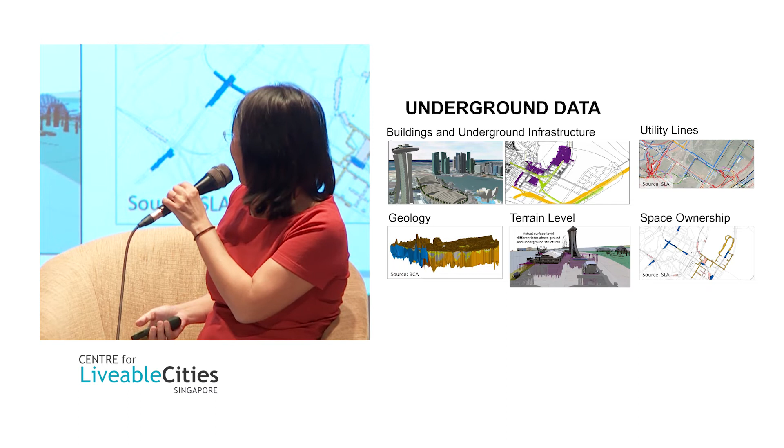Our geology, Singapore's geology, is one of the most varied among cities, and also things like space ownership - all that information we need to start to organize to help people plan and develop underground in future. We're not starting with a clean slate; there's already a lot of stuff down there, but we have to start somewhere so that in 30, 40, 50 years' time, you'll have a nice, ordered underground space.

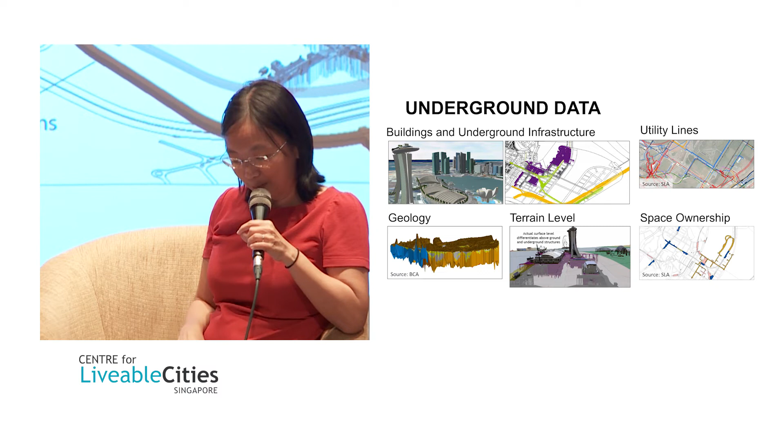That's why we have to think in 3D. One of the key aspects of planning underground is also to organize our space underground and decide who gets the highest level, who gets the middle level, who gets to go deeper.

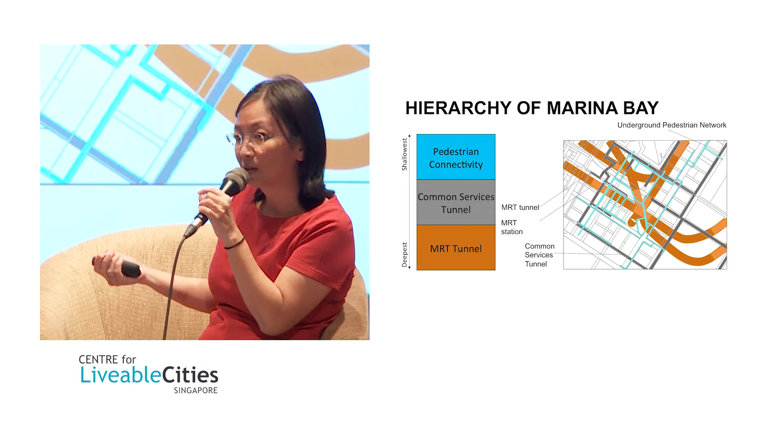Prof Yong has also touched a little on that, but the example in Marina Bay would give a concrete example. You've got a 2D plan, lines crisscrossing of 3 key underground infrastructure - our pedestrian network, our common services tunnel with the utilities, and our MRT tunnel. Even on 2D, you have a lot of intersection points. So how are you going to decide who gets which level? That's where the underground planning comes in.

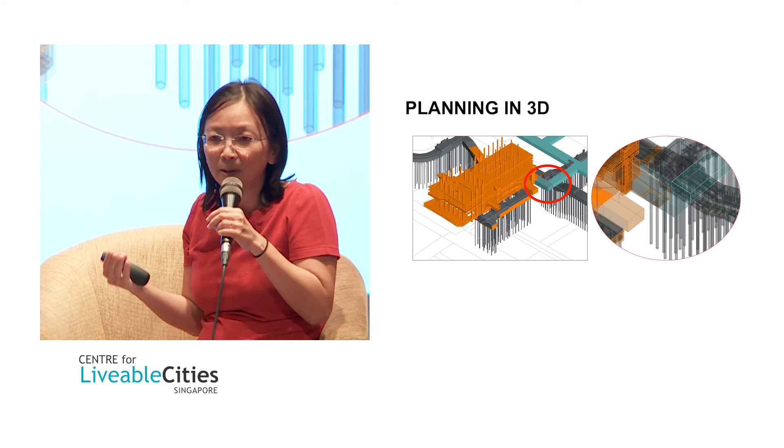With a 3D plan and the data in place, you can start to really look at the details and say, even though the space is crowded and all these things are coming together, there's a little space there that we can still fit a tunnel in, and we can plan ahead. So a 3D underground master plan will help us do that - coordinate users, decide which levels they should be at, safeguard corridors for the future, and share the information so everyone, the developers, the planners and engineers, all have a common basis to work around. That's broadly the flavor I want to give.

But broadly, just to say that from the government's point of view, we want to make the best use of our underground space. For that, we need to have in place policies, or a policy direction, of what we want to do with underground. We need enablers - that's the data and the R&D.

The data and R&D, and we need forward planning from the underground planning. And I would add a last point to say that, again, in line with what Prof Yong said, we're limited only by our imagination and, in a way, financing resources and stuff like that. But imagination of what we could do with our underground space, and then the engineering capabilities for this. So I also want to make a pitch out there that Singapore needs engineers to see this in future.

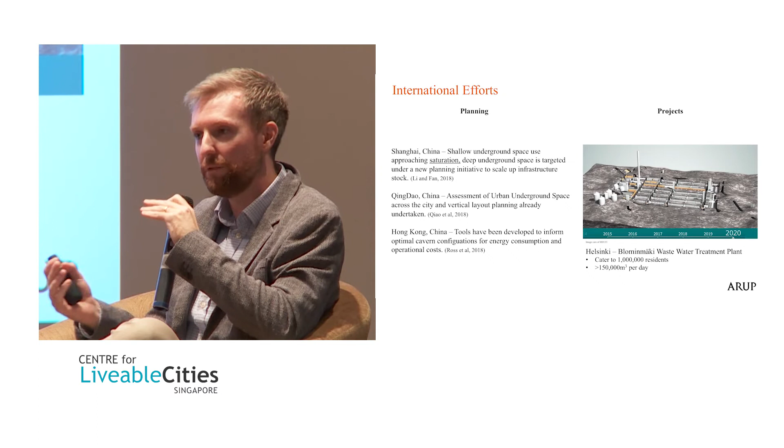So I think that just shows the degree of the problem or the issues being faced for urban underground space in China. The image on the right is taken from a newly released project in Helsinki—Scandinavia is very famous for these—a large underground wastewater treatment facility that essentially removes the need to have an unpleasant wastewater treatment facility at ground level, and that space can be used for some more attractive, livable purposes.

Some progress as we see it in Singapore. There's been a lot of work recently amongst many of the government agencies around understanding the underground space and what the asset is that essentially we have to play with. So I'm just highlighting one recent circular from the BCA and SLA, which has made publicly available information regarding borehole investigations into ground conditions. And this is the sort of progress that is really useful for engineers. It opens up that wealth of knowledge that exists across the country to inform our studies for future projects.

So a great asset to have recently become available. And the image on the right highlights the progress that's been made tackling underground space planning up front. We're really starting to see on a number of planning projects in Singapore and internationally, but especially in Singapore, the need and the requirement to consider what do we do with our underground space. So now when we're planning new estates, new areas, new business districts in Singapore, one of the stipulations is what are we going to do with the underground. And I think that's a key driver that the government has put in place, and I fully support that.

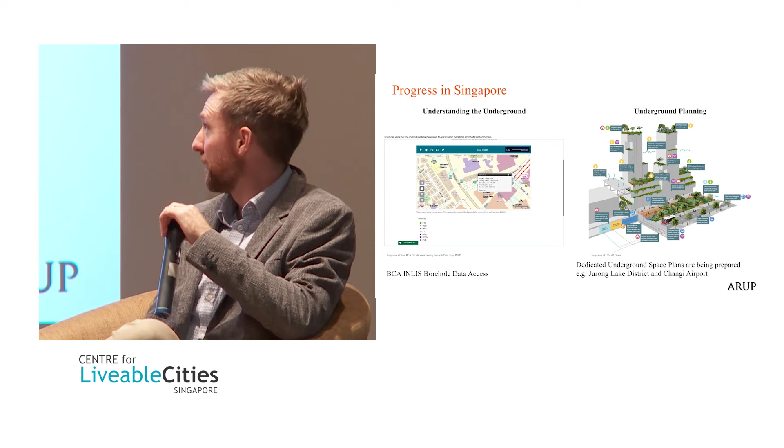And then lastly, I just wanted to highlight a couple of things which have been talked about, and what we think the future holds. I think Singapore, being where it is on its trajectory of exploring and enhancing the use of underground space today, is a good thing.

If we went back in time 10 or 15 years ago, the tools, systems and computational power available to help planners and engineers tackle these issues is not what it is today. So as the slide highlights, we're at that tipping point where we can actually start to handle the complexity of underground space, the geology, the existing structures, the interwoven mess of utilities, and everything else that's down there.

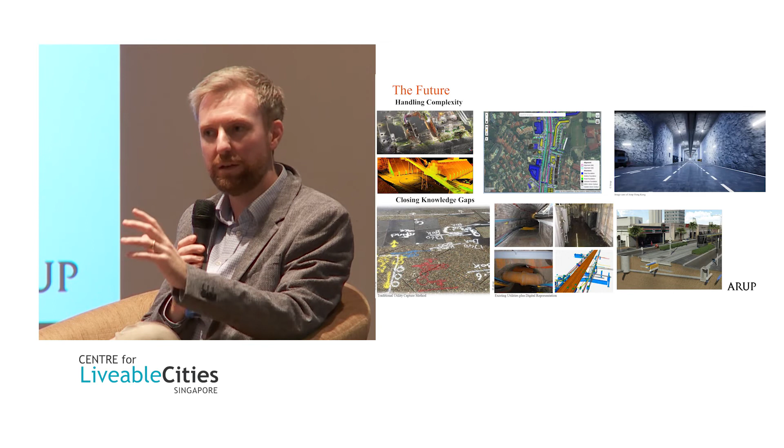We can start to handle that and visualize it, and that's a really key differentiator now versus 10, 15, 20 years ago, when a lot of the planning would have had to been done in 2D. I think some of the slides earlier highlighted the value of that three-dimensional aspect to the planning work, and essentially it's the technology today that enables us to do that. So I think we're at the very opportune moment in our path of underground space use.